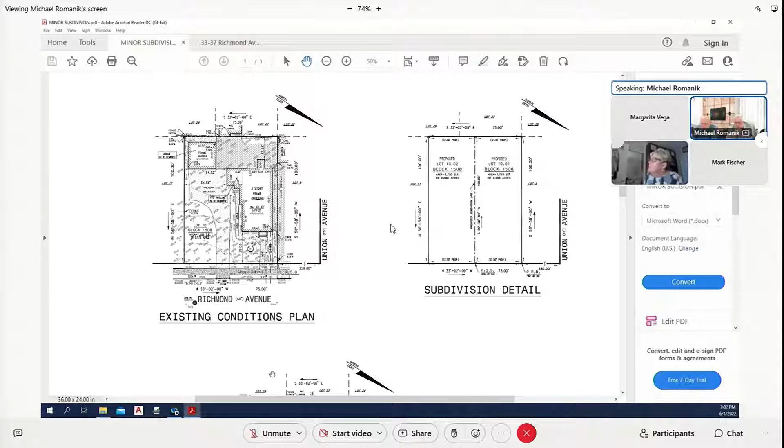Yes, the existing parcel is 7,500 square feet, as indicated. Obviously, it's on the west side of Richmond Avenue between Totowa and Union Avenues. There's an existing house on it, as you can see from the existing conditions plan of the site plan and subdivision drawing. We are proposing to remove the rear left section of the building, which represents approximately 225 square feet. That would also enable us to produce the subdivision we are proposing, where the one parcel would be subdivided into two lots.

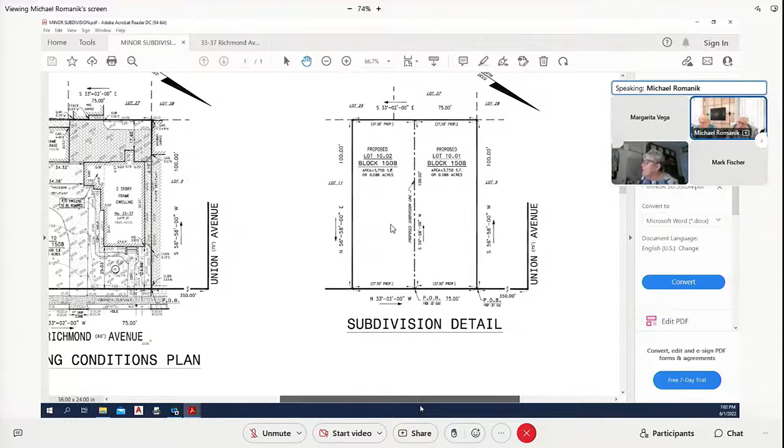If you look towards the right side diagram, you'll see the subdivision detail, which simply indicates that the 75 by 100 foot lot will be subdivided into two equal parcels, 37.5 feet wide by 100 feet, having a total of 3,750 square feet. That represents each parcel.

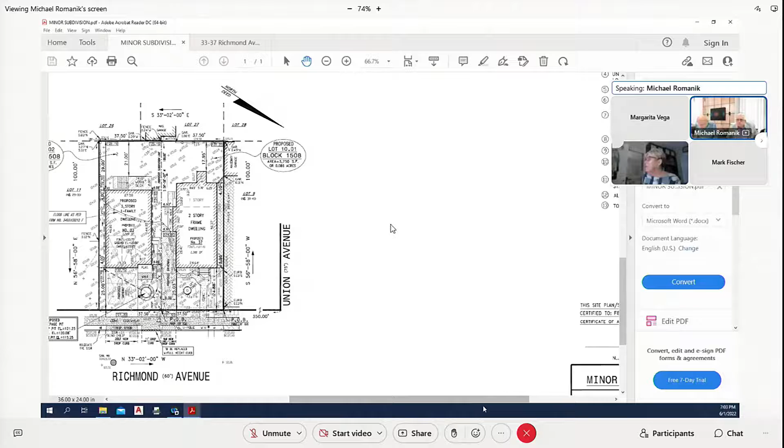Looking at the other diagram, Commissioners, the subdivision and site plan drawing shows the existing structure, the existing home on the right side, known as 37 Richmond Avenue. It's also known as the proposed lot 10.01. As you can see, the house will remain without the section in the back, which is proposed to be removed. And also, as the Madam Chairlady described, regarding the setbacks, we are deficient with respect to the combined total. We should have 14 feet.

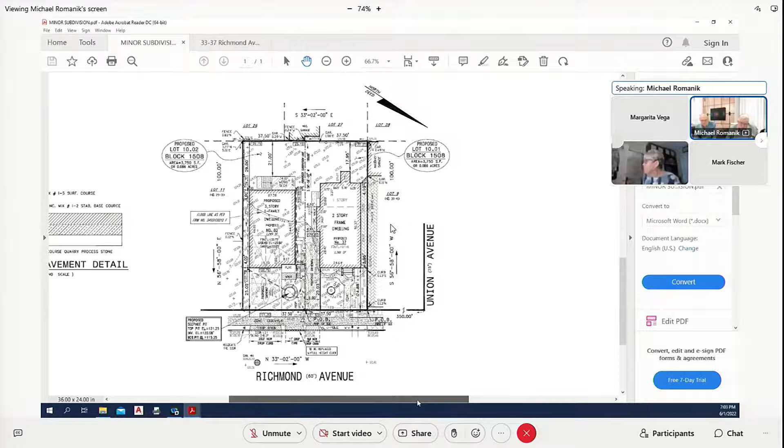As you can see, we have 4 feet existing on the right side, and we are proposing 7 feet on the left side, for a total of 11 feet. The ordinance requires 14 feet. There are also other variances that have been mentioned by the chairlady as well. If we look to the left of that entire parcel, you'll see the subdivision line and the new structure on the left side, known as 33 Richmond Avenue, also known as proposed lot 10.02.

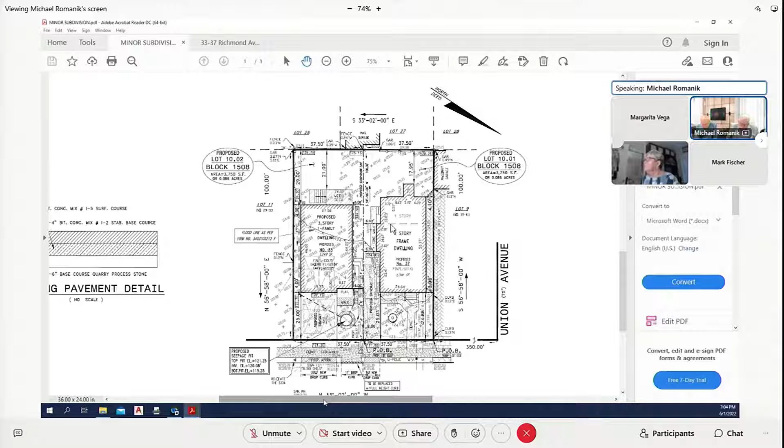There are some variances proposed there as well. We do have the required 4-foot setback on the left side, the south side as I'll indicate. We are proposing a 6-foot setback on the right side, for a total of 10 feet. We should have 14 feet, so we are deficient with respect to the combined setbacks. We are seeking and requesting a variance as well.

The rear setback to the deck that we are proposing in the back is 21 feet. We satisfy the front setback, as you can see on that drawing, Commissioners, of 25 feet, which is the minimum required. We do have a 2-car parking garage, as well as 2 spaces in the front in the driveway.

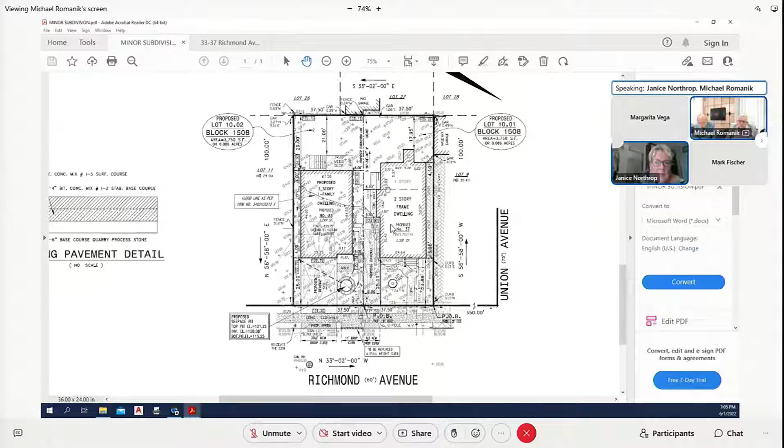And if I can just refer briefly to the existing house, we are proposing 2 parking spaces there on the left side of the existing building. Can you enlarge that a little bit? It's kind of minuscule. Okay, we are doing that now, can you see that now? Yes, it's a little bit better, thank you.

As you've already indicated, Madam Chair Lady, and also the board planner indicated, we're subdividing a 75 by 100 foot lot into two parcels. The right side will continue as a one-family dwelling with 2 parking spaces. The left side will be a one-family dwelling as well, 3 stories, but you'll look at the architectural drawing shortly, and you'll see what we've done with the 3rd floor to make it look more of a roof structure.

So there are variances associated with this. You can also see on that subdivision and site plan that we are providing drainage in the form of a seepage pit, which would pick up all the water from the roof leaders, and that would be going into a seepage pit that we are proposing in the front yard, as shown on that diagram as well.

So there are variances. We don't think they're very demanding as far as the ordinance goes. They're again combined setbacks, we don't feel they're major. The front setback of the existing building is 24.88 feet, supposed to have 25 feet. That is a pre-existing condition. The right side indicates at one point the setback is 3.95, and also towards the rear it's 4.10. 4 feet is the minimum required.

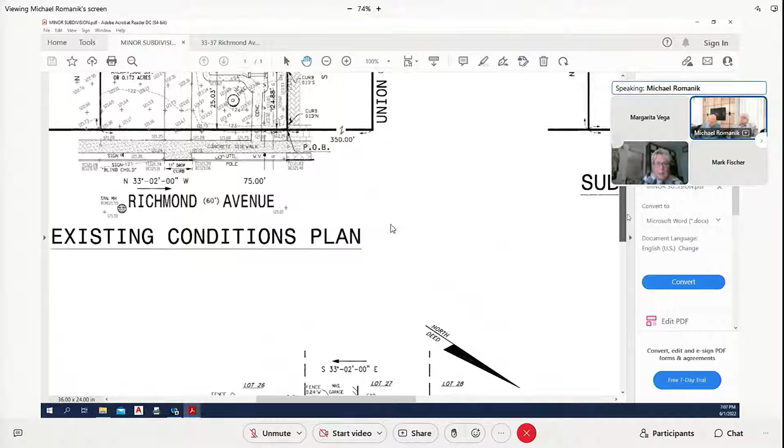So there are some variances that we're seeking with respect to also the lot coverage. We do exceed the 30% lot coverage for the right side lot, which is the existing - approximately 35% in my calculation. The proposed structure has a lot coverage of about 33.3%, which again does exceed the 30% lot coverage. Commissioners, that's all I have as far as the presentation of the existing conditions plan. You'll see the subdivision detailed plan as well, and also the plan which shows the proposed structure, Mr. Maricondo.

Okay, just like to follow up if I could, Mike, as well. With regard to the height of the buildings, we are within the actual height limitations of the ordinance, is that correct? Yes, we cannot exceed the dimension of 35 feet, will be no more than 35 feet in height. The ordinance, however, does allow or permit structures that are 2.5 stories, but we are proposing a 3-story structure, and you'll see what we've done with the 3rd floor. When you get to your architectural plan? Yes. Okay, so there is the height restriction, of course.

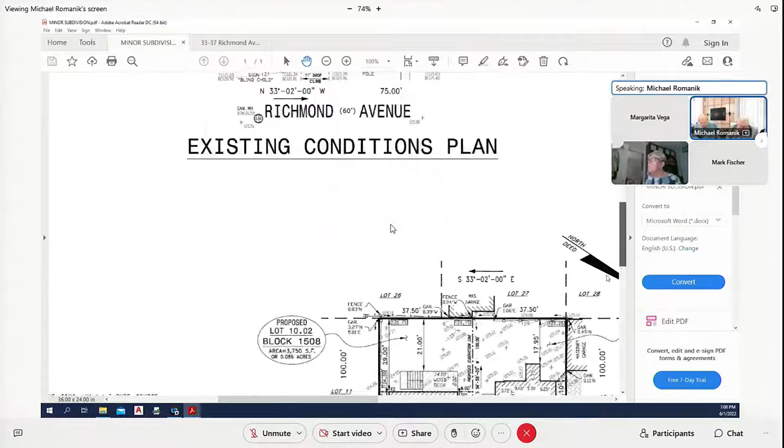And with respect to parking, did you want to talk about that in connection with your architectural drawings, or how the parking is laid out? Well, as I mentioned, the new structure will have 4 parking spaces. Good, I know there's an ordinance section that deals with parking in the front yard in front of the garage. There's a 2-car garage in the new structure, as well as 2 spaces in the driveway as well.

For a one-family house with 3 bedrooms that we are proposing, the ordinance requires 2 parking spaces, 2.5 parking spaces. So we are proposing a total of 4 parking spaces, and yes, 2 spaces in the driveway typically do not count, but from a practical standpoint, commissioners, we all know how people park in front of their garages, so we are proposing 4 there. And with respect to the existing structure, there are 2 spaces proposed on the left side of the building itself, along the subdivision line.

So we feel that would be adequate for the existing one-family house, and certainly the spaces we're proposing for the new house, we feel that is also adequate.

Still on your site plan, in your estimation, these variances do not create any negative impact on surrounding property owners? No, we feel it doesn't. The Hillcrest area, in this particular section, is primarily a one-family area. We are maintaining the residential character of that one-family status by proposing what we are.

It's a large lot now, 75 by 100 feet. It's a much larger lot than most of the surrounding lots, right? Most of the lots are 50 by 100. This is an exception, which has 75 by 100 feet, so it's extremely larger than most.

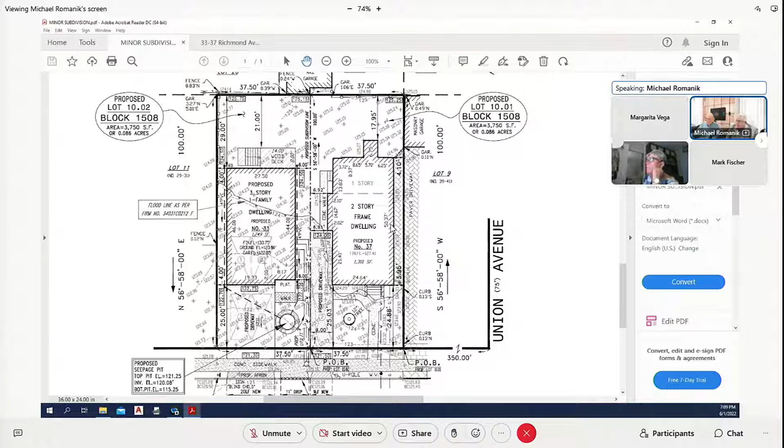So the use we're seeking is permitted within the zone? Yes, the R1 zone allows one-family homes. That is correct. Okay, so we can proceed to your architectural testimony.

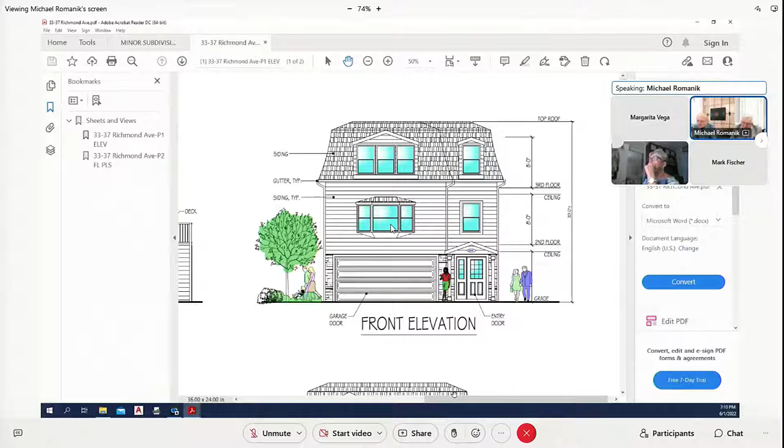If we look at sheet number 1 of the architectural set of drawings, looking at the front elevation, again it's a one-family house. You'll see what we're proposing fixed on the front elevation, the upper right-hand diagram. We actually created a mansard roof, so we have 2 stories, and a 3-story structure, where you can see, commissioners, what we've done with respect to the third floor. It's a combination mansard roof structure. As you can see, there are shingles proposed as well. The entry into the building is at grade level, as the notation indicates, entry door.

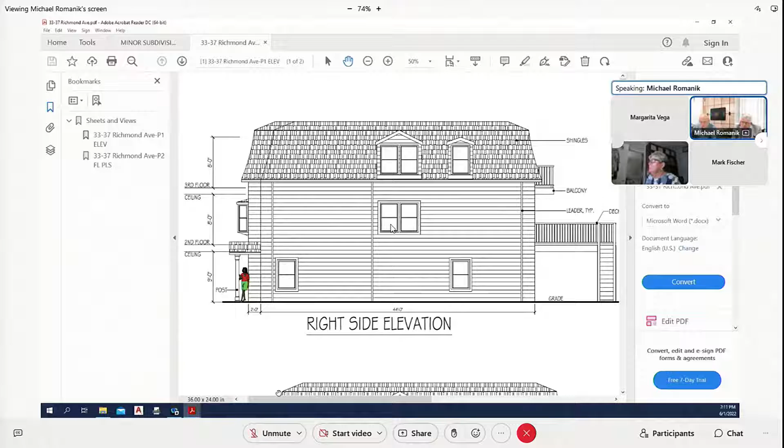If you look to the far left of that diagram, you'll see the right side elevation. The left part, where the figure is located, represents the front of the structure as well. You can see there's a little portico over the entry area. To the far right, we are proposing an optional deck, and we'll look at the size in a succeeding drawing. Also look at the diagram below the right elevation, that's the left side, which basically reflects the right side, with the front of the house on the right and the deck on the left.

Now to the far right of that, you'll see the rear elevation, which shows again the deck, which has stair access from the grade to the sliding doors of the second floor. Commissioners, you can see we're proposing siding on the house itself. There will be some stone veneer in the front of the building on both sides of the garage entry and entry doors.

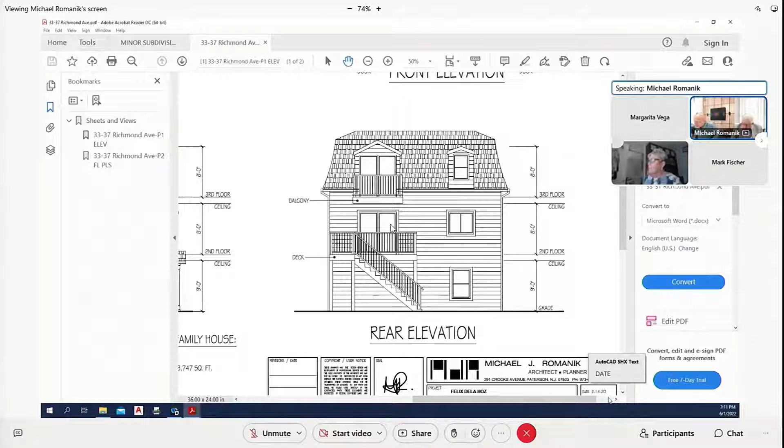Looking at sheet number 2 of the architectural set, Commissioners, you'll see on the far left of the diagram the ground floor level. That's the entry level where you'd walk in through the front exterior door. As you can see, there's a 2-car garage as well. Towards the rear, there's a recreation room, which would also accommodate the HVAC system and the water heater. We also have recycle bins there for plastics and so on.

As you enter the door, you'd go upstairs to the second floor, Commissioners, which is the center diagram. It's an open plan, as shown by the notations - a living and dining area that opens into the kitchen and breakfast area. Towards the back, where the breakfast area is, the owner wished to have an optional deck. He's not sure whether he's going to build it, but the dimensions are 8 feet by 14 feet with stairs leading directly to the ground level. You'll see where the stairs are located, not only to go down to the ground level but also up to the third floor.

That third floor is the diagram to the far right of that sheet, and you can see the 3-bedroom layout. The master suite is towards the rear, with a balcony approximately 3 by 7 feet. There's a master bathroom as well as a large walk-in closet. There are 2 other bedrooms on each side of a proposed bathroom. The washer and dryer is also located upstairs, which joins the stairs going down to the lower levels.

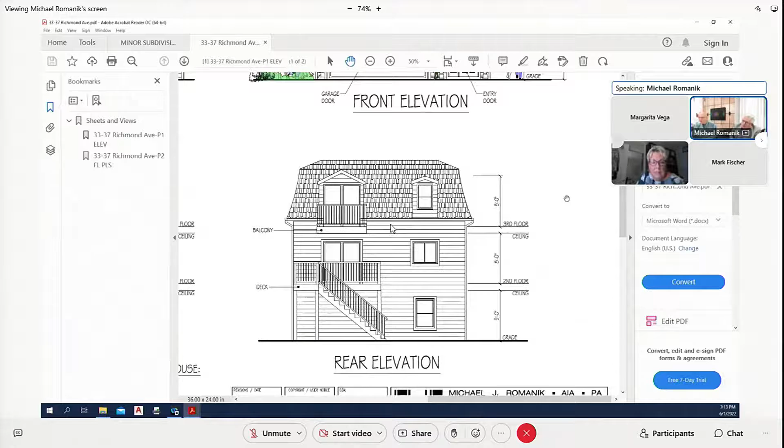The area of each floor is approximately 1,249 square feet. It's a one-family house. Commissioners, if you go back to sheet number 1 of the architectural drawings, looking at the front elevation right above there, you'll see we do realize the ordinance allows a maximum of 2.5 stories, and a half story typically means an attic.

Here, what we've done was create 3 stories. However, you can see the 2 full stories as far as the ground floor and second floor, and you can see how we treated the upper level. We made it a mansard roof, so it would blend into the architectural character of the neighborhood and also so it doesn't seem to be a large story, quite honestly. That's the full story, because there's no large roof above that or attic.

There is no attic that you'll be able to walk in. In full essence, that is an 8-foot-high ceiling, but you can see from the dimensions, the top of the roof, or the attic if you want to call it that, would only be essentially 2.5 to 3 feet. So there's no attic in the structure.

You're not going to be able to pull down stairs and go into the attic because we tried to keep a low profile, as you can see. And again, we are keeping within the dimension of no more than 35 feet, which is the allowance of the zoning ordinance. That's essentially a description of the architectural drawings, Madam Chair Lady.

Okay, Madam Chair and Commissioners, I would conclude Mr. Romanik's testimony at this time.

I have a question. On one of the previous drawings, I think it was on the actual review, it showed a picture of the original house that's on the property.

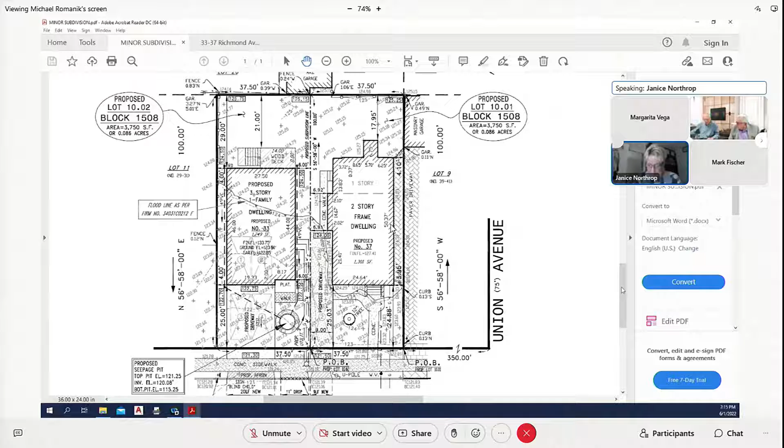Correct. Okay, can we go back to that, because I have a question. I guess it would be on the site plan, Madam Chair? I think it was, yes. It's not on the architectural. On the site plan. It's not on the site plan, I think that might have been on the staff review, I think there's a photograph. The staff review, Madam Chair Lady, let's see, are you looking within the review, Madam Chair? That's the third sheet in the staff report. And the site plan, the first page also depicts the existence of the house, correct?

Yes, I think so. Madam Chair, are you talking about the aerial photo from the review? I'm not sure, I think it was the actual. Madam Chair is referring to figure 2 in the staff review, page 3. Hold on, can everybody just wait until I sign back on please, because I think I got a problem here. Absolutely, I will speak to IT staff, everyone mute your microphones until the chairwoman reconnects, thank you.

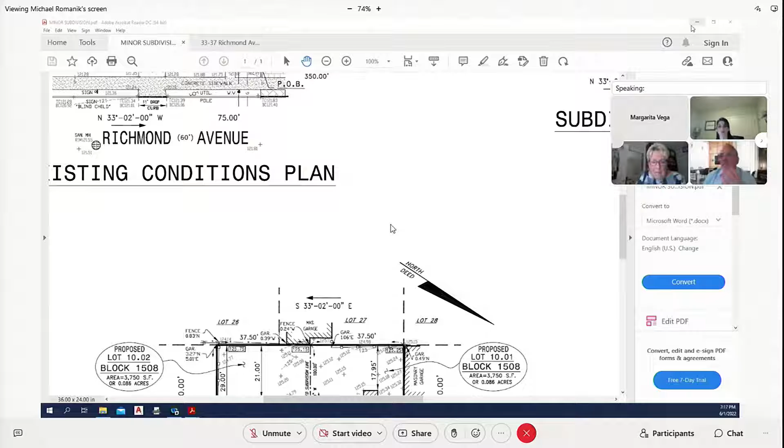I gotta get back in here, there's something wrong again. You sound good on my end and I can see you. Yeah, but I can't see anybody, so I'm gonna have to, okay, thank you. I think this is gonna echo, and if it does, I have to go back out, let me see. Can you hear me? Can you see me? Yeah, okay, I'm gonna go back. Now you have to go out. Yep, I'm going out. And Melinda, can you hear me? Fine. Yes.

Okay, can you hear me? Yes, Madam Chair, I do. This is, and also Madam Chair, what we're talking about, I think, is page 3 of our review. So I don't know who has that, or who can put that up, but it doesn't really matter, I wanna ask, somebody will know.

There's a little bit jetting out on the original house, like a porch, if you're looking face-on at that picture, there's a little side thing jetting out from that, is that what's being removed? It's between the house and the garage, it's connected to the actual house, there's actually a door going into it. Yes, I'm looking at it now. Is that going to be removed, Mr. Romanik?

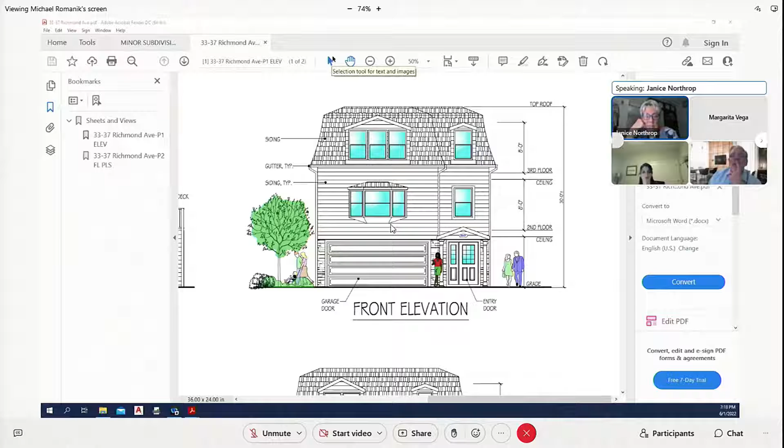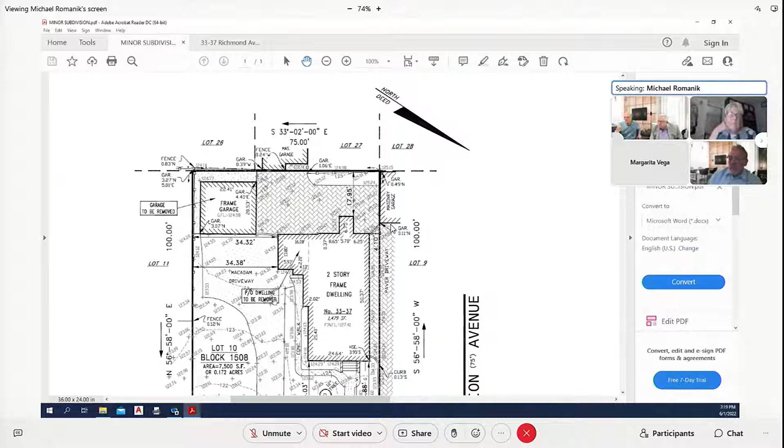Yes, as a matter of fact, on the existing conditions plan, you'll see - yes, let's scroll to the top there a bit more. You can see there's a notation on that drawing, it actually says part of dwelling to be removed, and as I indicated, it's about 225 square feet, so that's going to be removed - that section in the back, that is correct.

So at this time, I'm going to open it up to our commissioners, and ask if there's anyone of the commissioners that has any questions.

This is Commissioner Figueroa. Yes, go ahead. In line with your question with that area, is that where that flood path is gonna be? In that middle part right there?

Commissioner, can I interrupt you one second? Madam Chair, I don't know if maybe I missed the announcement from you, but I do see Commissioner Cleaves on the screen now. Was she recognized? No, I don't see her on the screen, or I would have recognized her. Okay, I can see her now, on the bottom. So I don't know how, when she actually signed in.

I signed in, probably about a quarter, yeah.

May I interject here? On my phone, Commissioner Cleaves was on before the last testimony, I couldn't interrupt him, so I was trying to text Mr. Aquaviva. But she has been on for the past 15 minutes, I'd say, at your last testimony. Okay, Commissioner, did you hear the testimony in this application? Yes, I did, I heard both of them. Okay, so based upon that, Madam Chair, I think the board can recognize her as being present at the meeting tonight. Right, okay, I have no problem, thank you very much.